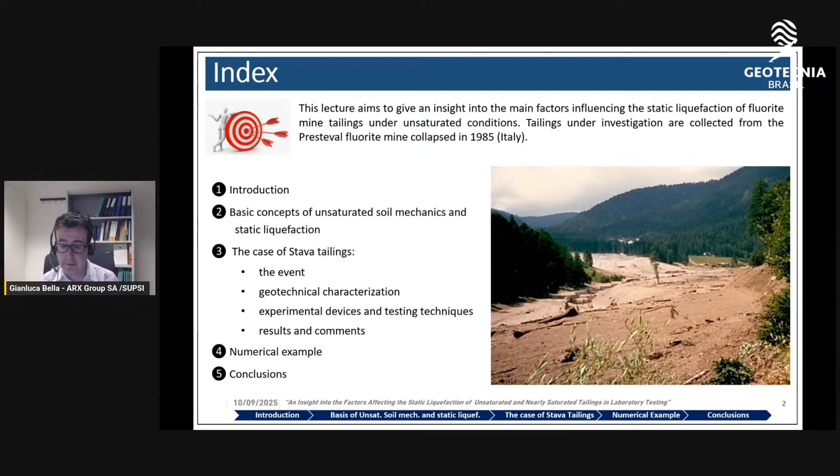Here is the structure of the current presentation. After the introduction, in the first part of the lecture, I will provide some basic concepts about unsaturated soil mechanics and static liquefaction. Then, in the second part, I will show you the main experimental results obtained by carrying out monotonic triaxial tests on the Stava tailings. Their susceptibility to static liquefaction was experimentally investigated by analyzing factors such as sample preparation technique, initial density, and degree of saturation. I will conclude my lecture with a numerical example where these concepts were used to perform a stability analysis of an ideal tailing dam. Finally, some conclusions and remarks will follow.

Okay, so let's start with the introduction. Tailings are the waste products resulting from the chemical and mechanical separation processes of mineral extraction, comprising mixtures of crushed rocks and processing fluids. Their particle size ranges from sand to clay silt sizes, and their production in recent years is constantly growing.

As you know, tailing dams represent some of the largest and most complex geotechnical structures in the world. These structures usually comprise a raised embankment constructed in stages over the life of the embankment, and a basin aimed to store billions of tons of tailings material. According to the classical hydraulic segregation profile, a higher permeability zone made up of coarse particles would exist near the embankment discharge point, with a lower permeability zone made up of fine particles farthest from this point, and between them, an intermediate permeability zone, the beach.

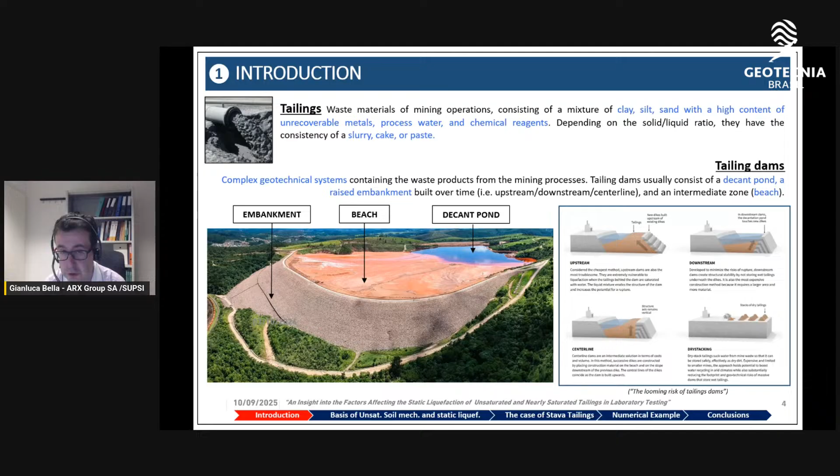Why is the stability of a tailing dam a relevant issue? I try to analyze some causes. Tailing dams are complex structures, and they are particularly prone to failure for the following reasons: they are made of heterogeneous filling material, and dams are raised step by step over a large period of time, many years.

Sometimes there are poor regulations or poor specific design criteria, even if in recent years regulations have made great advancement in many countries. And their large surface makes punctual criticality identification very difficult, requiring extensive and continuous monitoring, which is costly and time consuming.

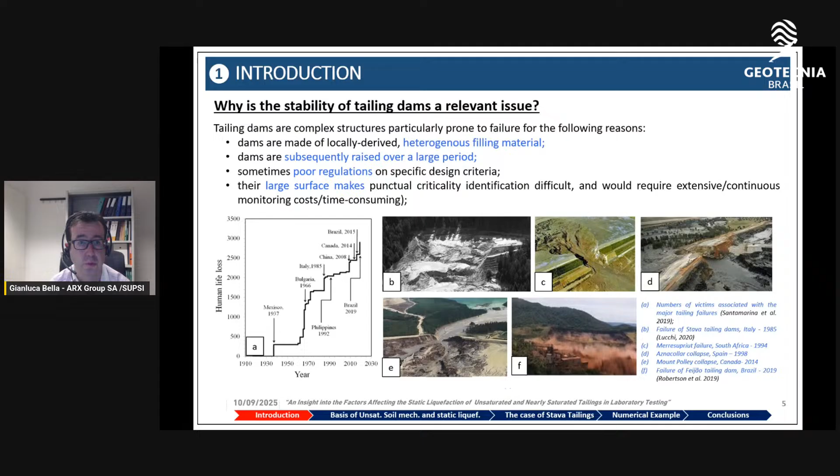So why is the stability of tailing dams a relevant issue? First of all, because the collapse of these structures may result in fatalities and significant economic and environmental impacts, as shown by recent failures in Brazil, South Africa, and elsewhere.

We can see that the annual tailing growth is estimated at about 12 cubic kilometers of tailings, and the total number of tailing dams - active, inactive, closed facilities - is very high: 8,500, with 217 cubic kilometers of disposed tailings. This quantity would be enough to fill a cube 6 kilometers high, so very large quantities.

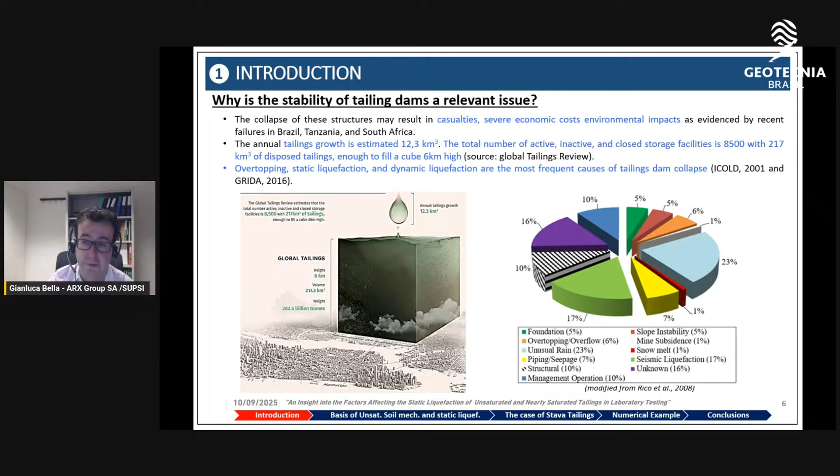Overtopping, static liquefaction, and dynamic liquefaction are the most frequent causes of tailing dam collapse, as we can see in the pictures on the left and on the right.

A list of the main causes of tailing dam failures. There are many factors that can contribute in combination to lead a tailing dam to fail.

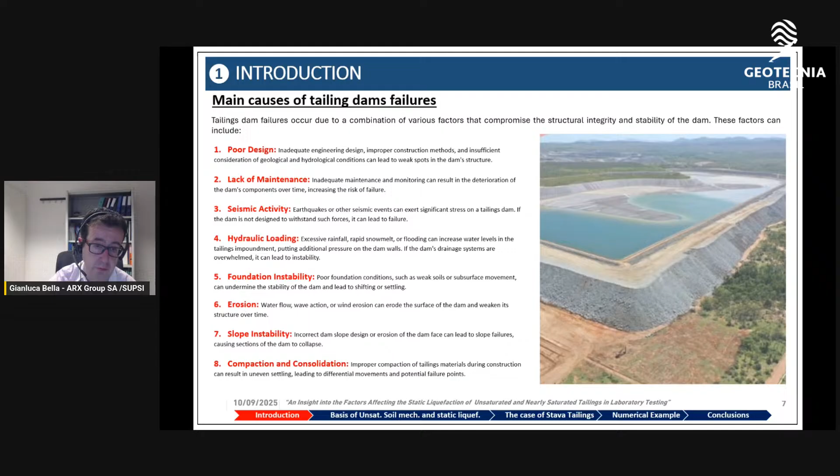First of all, poor design, then a lack of maintenance. Failure can be due to seismic activity or hydraulic loading, foundation instability, erosion phenomenon, slope instability, compaction and consolidation can be another cause of tailing dam failure, piping and seepage, structural failures, compartmentalization failures, or human error, and regulatory and oversight lapses.

But what I would like to focus on in today's lesson is the saturation of tailings. If tailing materials become overly saturated, they can lose shear strength and cohesion, making them prone to slumping and causing instability in the dam.

Finally, we have a change in water content as one of the main causes. Seasonal fluctuation in water content within tailings can impact embankment stability, particularly if the dam's drainage and water management are not working effectively.

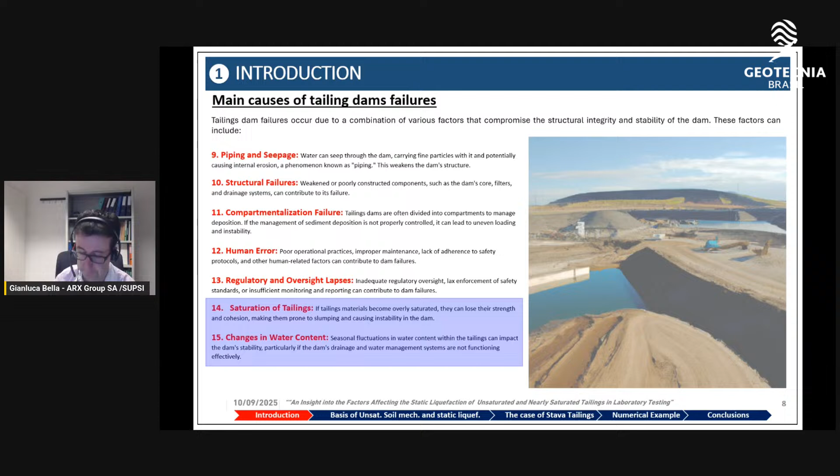Okay, so now we can move on to some basic concepts about unsaturated soil mechanics and static liquefaction.

As we can see in these pictures, tailing basins are heterogeneous and complex systems subjected to many external factors affecting their operation. For example, the amount of surface runoff, the infiltration rate, the consolidation process, or the capillary rise, as shown in these pictures. These factors, caused by interaction with the atmosphere, govern the position of the phreatic surface within the basin, leading to variation in the height of the unsaturated zone above the water table.

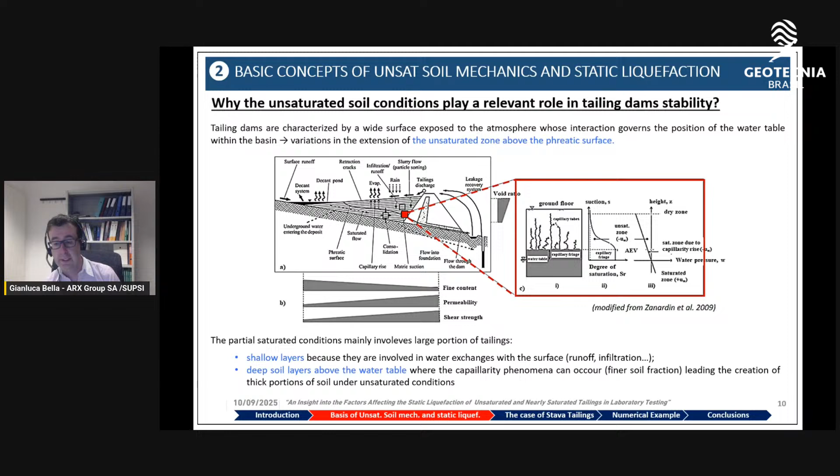The unsaturated condition mainly involves a large portion of tailing dams, in particular shallow layers, because they are involved in water exchange with the atmosphere, such as surface runoff, infiltration, and so on, and involves also deep soil layers above the water table, where capillary phenomena can occur, especially for the finer soil fraction, leading to the creation of a thick portion of soil under unsaturated conditions.

Above the water table, we have the so-called vadose zone, or capillary zone, in which capillary rise occurs because the soil pores act as capillary tubes.

Due to capillarity, we have an ascending flow of water within the capillary tubes, and this rise basically depends on the diameter of the capillary tubes and other factors that are constant when we deal with the same water system. The smaller the capillary tubes are, the higher the capillary rise is.

Therefore, imagine the soil as a group of capillary tubes having different sizes. At different heights above the water table, there are tubes that will gradually desaturate. So there is a zone immediately above the water table where the saturation is still total. Then there is a zone where the degree of saturation gradually decreases and becomes zero at a certain height distance from the water table, as we can see in the central pictures.

Contextually, we introduce the variable used to describe the pressure within unsaturated soil, which is the matric suction. It is the negative value of pore pressure. Above the water table, the pressures are negative, and thus we have a positive suction that increases with height.

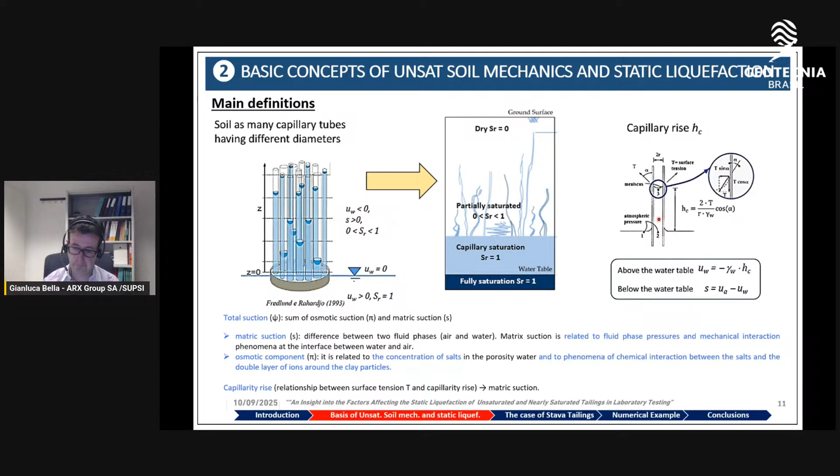Okay, so unsaturated soil can be assumed as a medium made of soil, water, and air. The effects of suction for unsaturated soils are the following.

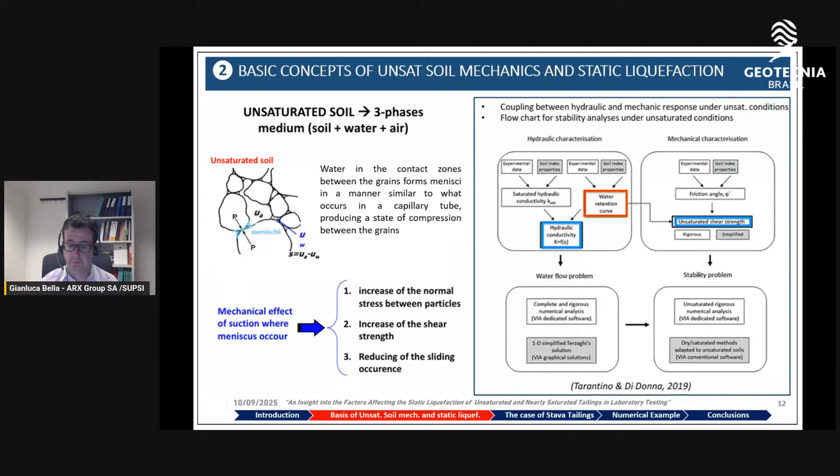According to Sladen, liquefaction is a phenomenon in which a soil mass temporarily loses a great part of its shear resistance when subjected to monotonic, cyclic, or impulsive loads, and it flows as a liquid. Recently, Olson defined static liquefaction as a complete loss of strength that occurs when the pore pressure of a saturated soil equals the mean total stress, bringing the effective stress to zero. As a consequence, when a soil liquefies, it behaves as a fluid since it has no temporary shear strength.

In the picture on top, we can see the definition of the state parameter, very useful to static liquefaction. This parameter was proposed by Been and Jefferies in 1985, and it is defined as the difference between the current void ratio and the void ratio at critical state. If this difference is positive, the sample is prone to liquefy, meaning we are dealing with a loose sample prone to show contractive behavior, and vice versa.

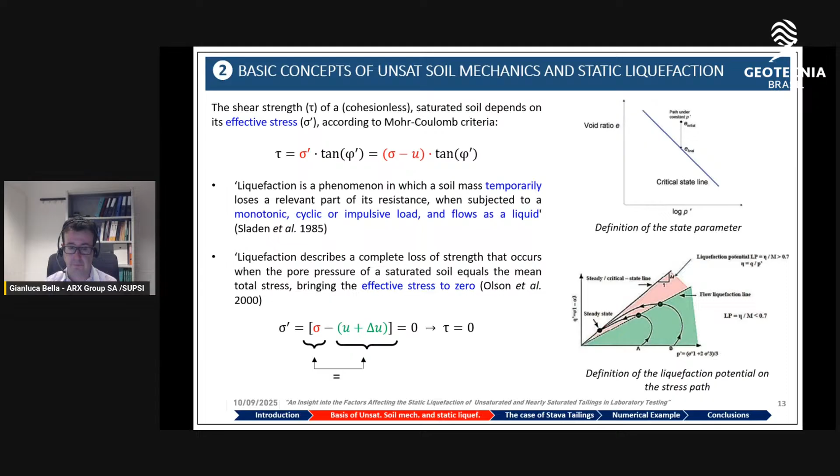Is static liquefaction correlated to tailing dams? Yes, the answer is of course yes. Static liquefaction, for instance due to heavy rainfall, is one of the major causes of collapse of tailing dams, leading to the higher numbers of tailing dam failures in the world.

It is worth remembering some considerations made by eminent researchers about it. Davies said that among the failures of tailing dams, static liquefaction is the most common, but also the least well understood phenomenon. And some years before, Fourie reported that in the past, many tailing dam failures have been wrongly attributed to other causes, and the role of static liquefaction has not been recognized as one of the leading collapse factors.

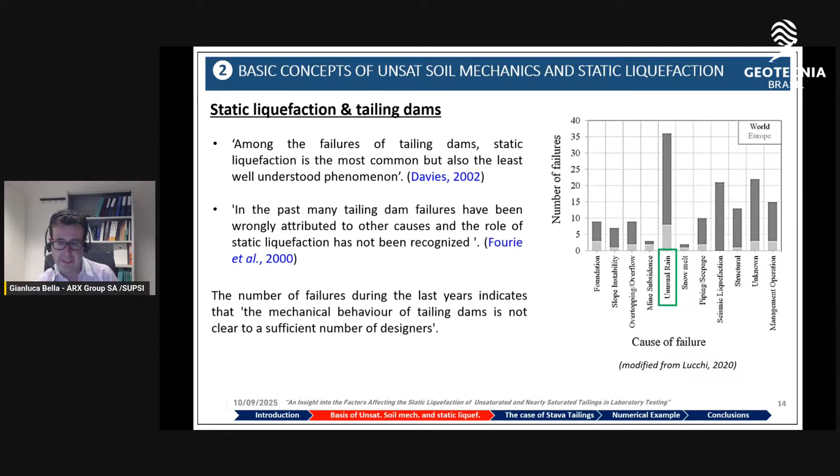So we can conclude that the number of collapses that occurred in the years indicates that the mechanical behavior of tailings at the moment is not clear to a sufficient number of designers.

So why are tailing facilities complex geotechnical systems particularly prone to failure? Guaranteeing the stability of such impoundments is, of course, one of the most challenging tasks in mine waste management. These storage basins are in fact prone to failure for static liquefaction for the following reasons.

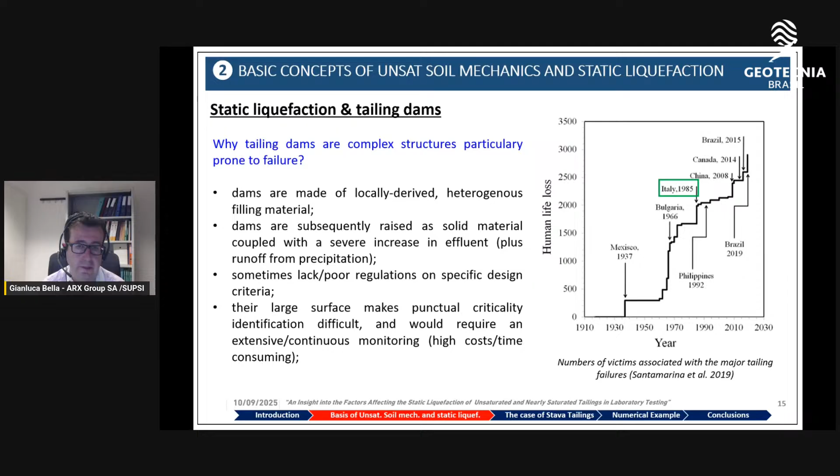First, they are made of locally derived filling material, soil, coarse waste, overburden material from mining operations. Second, dams are raised step by step, as I said before. Third, sometimes there is a lack of regulation, and of course there is some difficulty to identify punctual criticality.

With reference to the in situ scale, we can say that for a contractive soil, static liquefaction could be induced by fast variation in the total stress under undrained condition. For example, erosion of the dam toe, collapse of the foundation, excessive dam rising rate.

And more in general, the liquefaction can also be caused by change in the hydraulic conditions of the site. For example, increase of the phreatic water table caused by unusual rains, snowmelt, or failure/collapse of drainage systems.

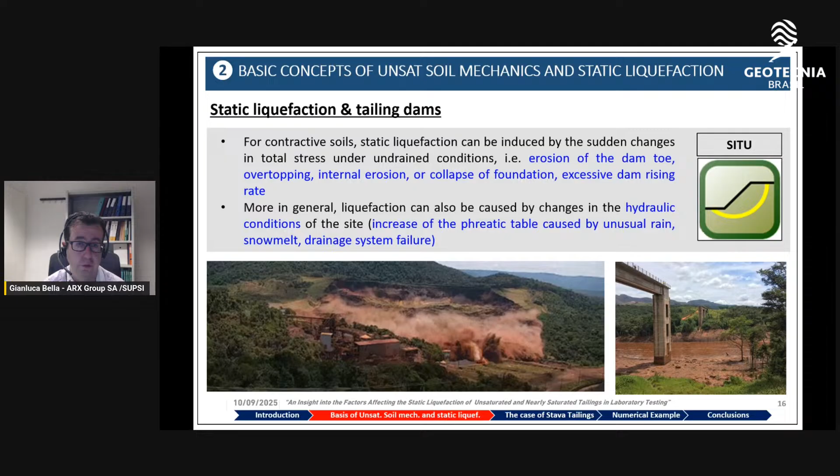And how can we study static liquefaction from the experimental point of view? In the previous slide, we saw static liquefaction from the in situ scale. Now we try to define static liquefaction from the laboratory point of view.

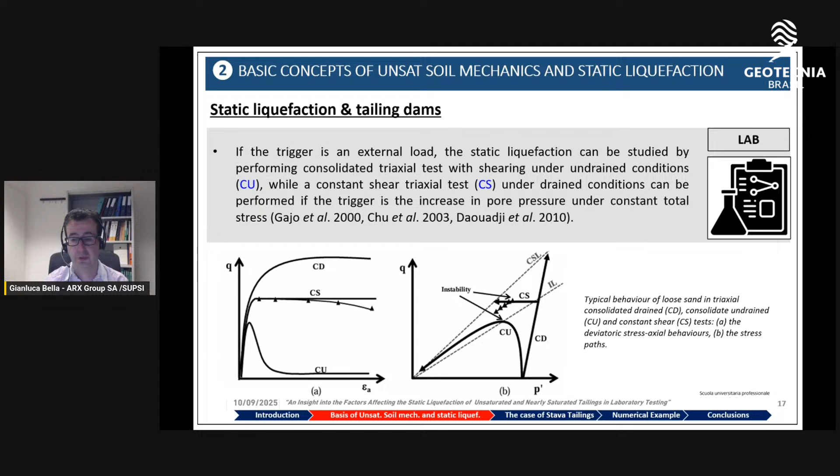If the trigger is an external load, static liquefaction can be studied by performing consolidated triaxial tests with shearing under undrained condition, while a constant shearing triaxial test, CS, under drained condition can be performed if the trigger is the increase in pore pressure under constant total stress. So there are different ways to study static liquefaction in the laboratory.

Finally, some case histories of failure due to static liquefaction. The Wachusett Dam at the beginning of the last century was the first example of a static liquefaction collapse, but it was not recognized at that time. Another famous example of failure due to static liquefaction is the Calaveras Dam in 1918 in the USA, and this is an example where static liquefaction was identified for the first time.

Then after that there were many other famous collapses. For example, the Merriespruit gold tailing dam in South Africa in 1994, or the Mount Polley dam in Canada in 2014.

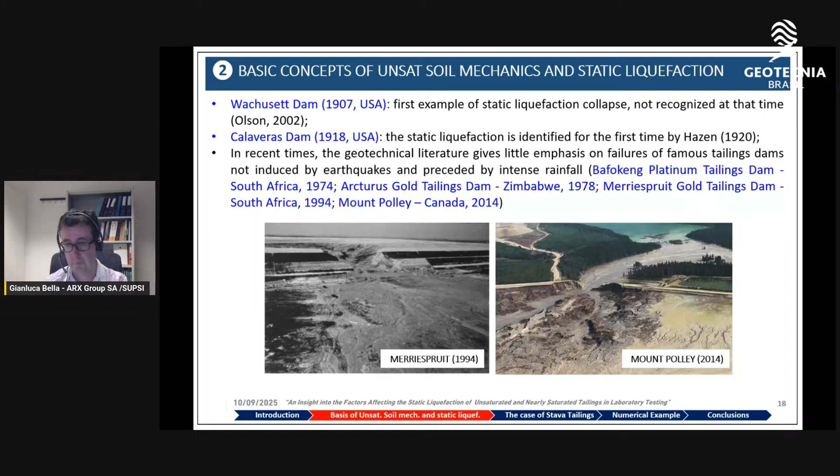So we can, from these slides, say that a deep knowledge of the hydromechanical response of tailings under unsaturated condition represents a fundamental aspect to perform reliable stability analysis of tailing dams.

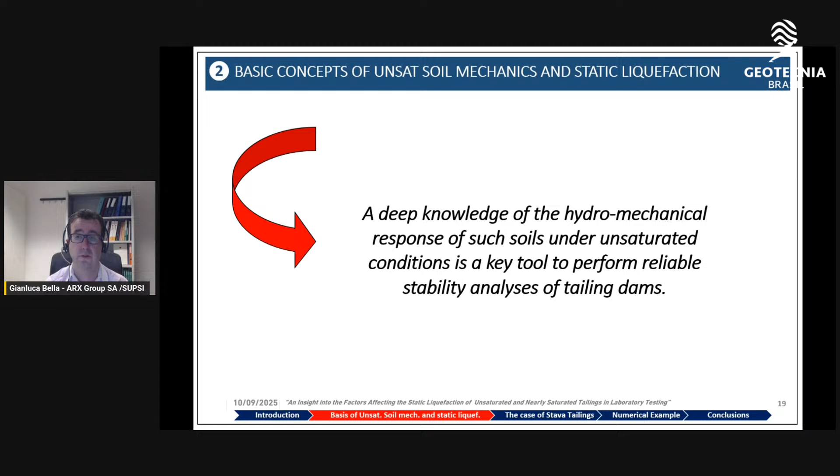After having introduced some concepts of unsaturated soil mechanics and static liquefaction, I can approach the core of these lectures, and this part deals with the experimental study of the static liquefaction susceptibility of a real case, the Stava tailings.

The soil under investigation is the silty fraction of tailings from the lower portion of the Stava upper dam, built one above the other on a natural slope near the municipality of Stava. We are in Italy. The two tailing dams were gradually raised to store the waste products coming from the separation process of the Prestavel fluorite mine.

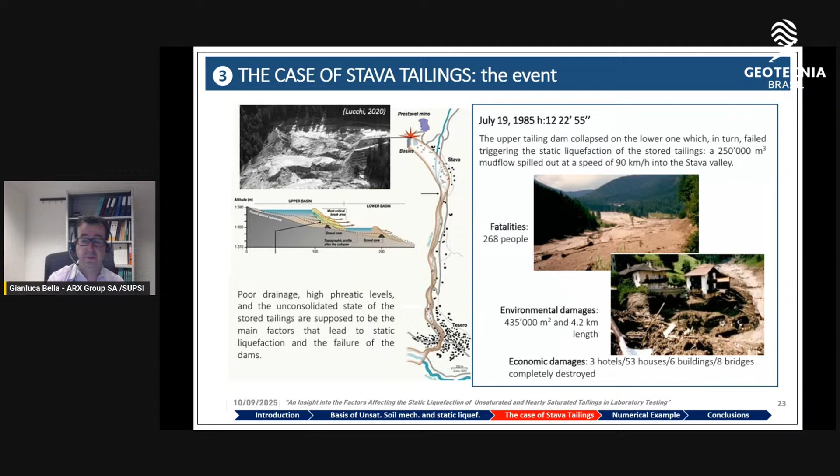Poor drainage, high phreatic levels, and the unconsolidated state of the stored tailings are supposed to be the main factors that led to static liquefaction and so to the failure of the dam.

Before showing you the experimentation to investigate the static liquefaction response of Stava tailings, it's worth noting that the same soil was previously characterized over the years by myself and by other researchers to investigate other aspects different from static liquefaction.

The first study was carried out by Carrera about 20 years ago. He performed basic oedometer tests and triaxial tests on Stava tailings under saturated conditions.

What she observed: the clean sand, as we can see in the picture on the top right, is subjected to liquefaction only for very high void ratio. The sand mixed with about 30% fines and 50% fines both reach liquefaction at a lower void ratio than the clean sand, and the 50-50 mixture liquefied at the lowest void ratio.

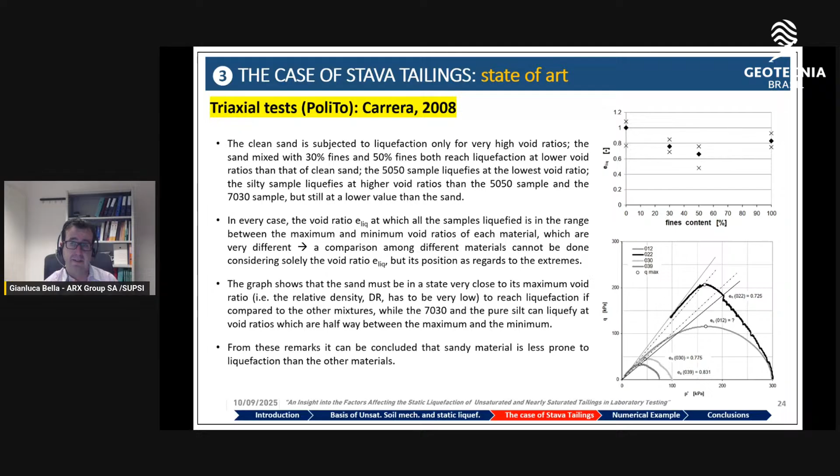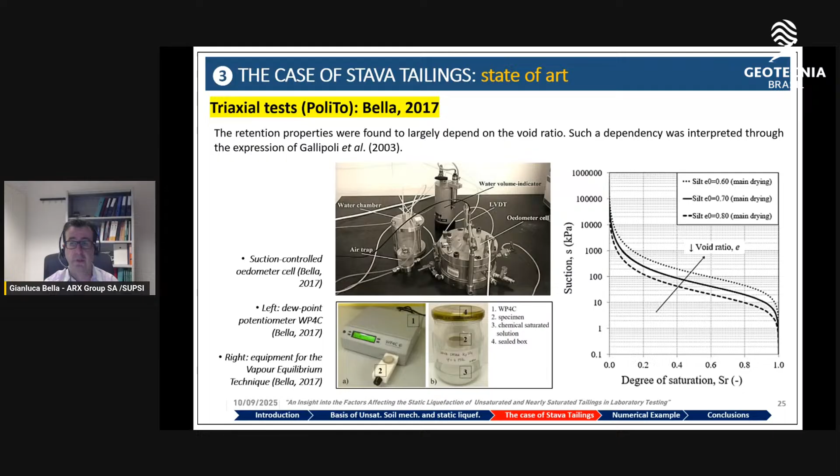After Carrera, there were some other research studies. In particular, I studied the research performed by myself in 2017 at Politecnico di Torino. I performed water retention tests using a suction-controlled oedometer to investigate the water retention response of the same soil. The retention properties of Stava tailings were found to largely depend on the void ratio, and such a dependency was interpreted through the expression of Gallipoli, obtaining the water retention curve given on the right.

Carrera in 2008 carried out an extensive experimental investigation to define the shear strength of the same soil under saturated condition. Some years later, I performed additional investigation using suction control triaxial tests to mechanically characterize the soil under unsaturated condition. On the right, we see the critical state line with experimental points: red for the saturated sample, black for the unsaturated sample. So we tried to characterize both unsaturated and saturated shear strength of the soil.

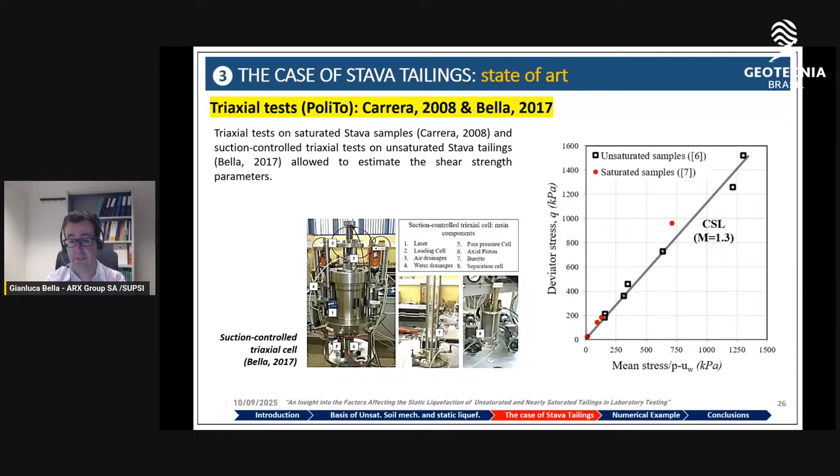Moreover, together with my colleague from the Applied University in Switzerland, we performed additional tests using a conventional oedometer to investigate the compressibility response of the Stava silty tailings in unsaturated and saturated condition, estimating the compressibility of the soil at different suction levels.

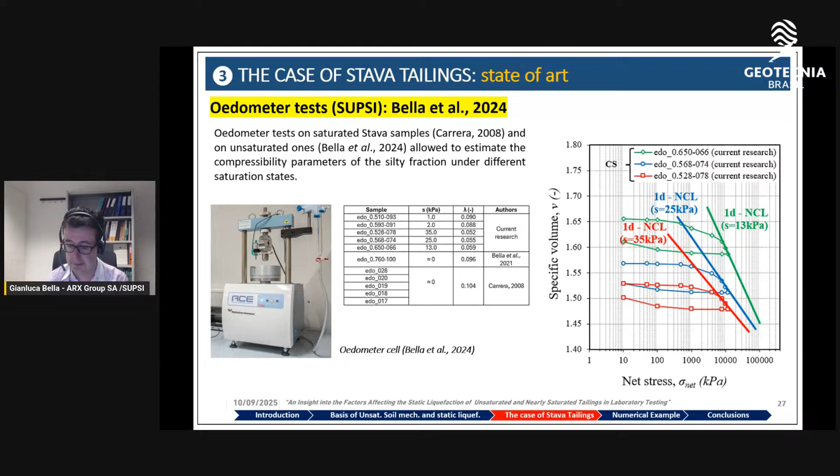Now let's come back to the current experimentation, the focus of these lectures, to investigate the static liquefaction of Stava tailing in unsaturated condition. Some monotonic triaxial tests were carried out on reconstituted samples, 38 mm initial diameter and 76 mm initial height. They were prepared at different initial void ratio and water content.

Two sample preparation methods were adopted. First, external compaction was used to prepare samples 1 and 2, and the moist tamping method was adopted for samples from test 3 to test 8. The moist tamping technique was chosen to reproduce one of the most common deposition procedures of tailings into the basin.

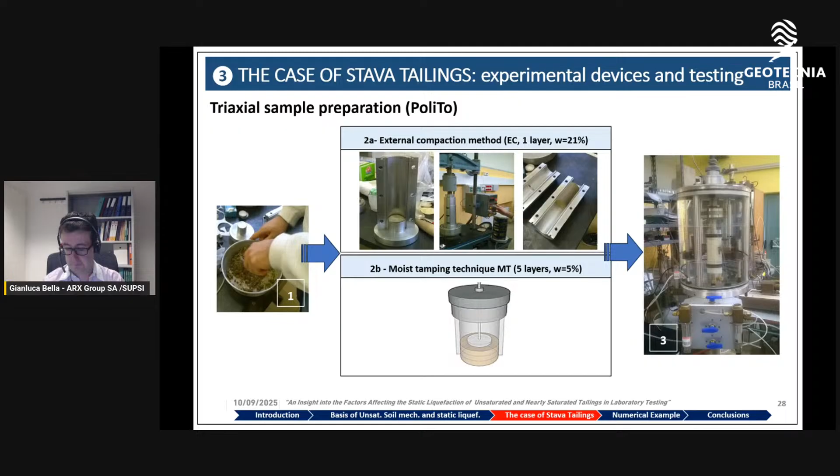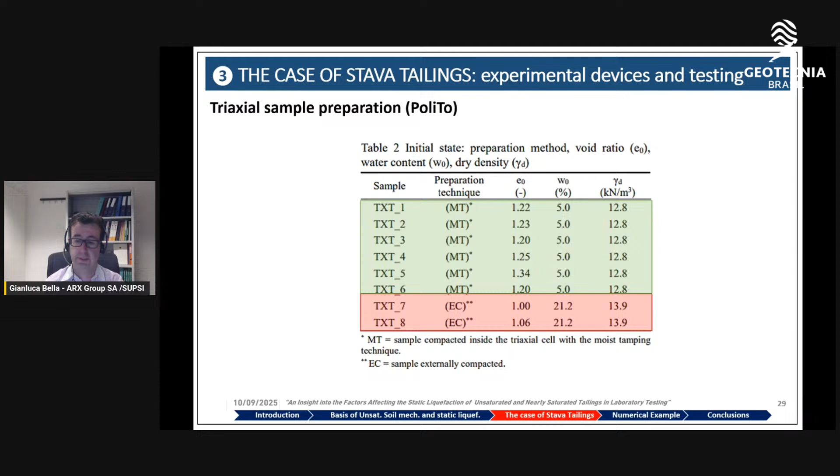The triaxial tests were carried out following these phases. First, partial saturation of the sample, involving the flushing phase and the back pressure phase, in order to get the Skempton coefficient parameter less than 1 - we obtained values from 0.89 to 0.99.

Then followed an isotropic consolidation of the sample, reaching a mean effective stress equal to 80 kilopascal, and finally a strain controlled shearing was applied under undrained condition at constant radial effective stress. Then back analysis was performed to analyze the real properties of the tested sample.

In these tables, we can see the void ratio at the final consolidation phase, the degree of saturation reached by each sample at the end of the consolidation phase, and the matric suction - the minimum and maximum values - estimated using the water retention curve shown some slides before. In the last column, we can see whether the sample liquefied or not.

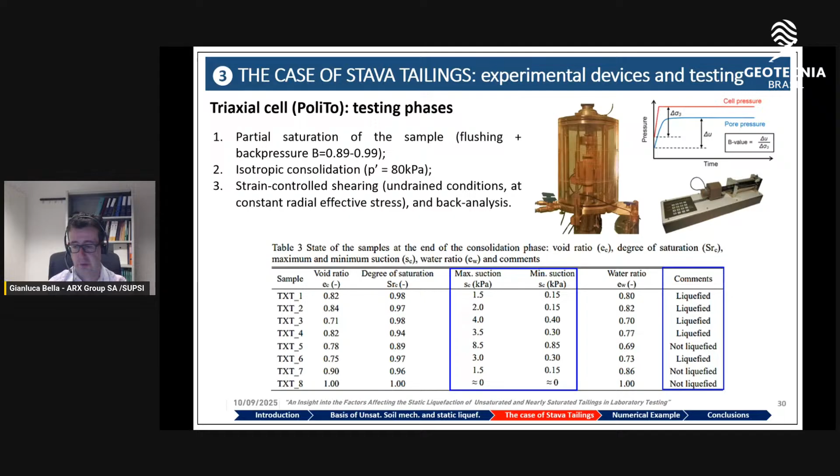During the B-check and during the consolidation, wetting was caused by the decrease in sample volume, not accompanied by an identical decrease in water volume. As the void ratio decreased during all these stages, the position of the main branches of the water retention curve evolved as well, with a general increase in the air entry value and the air occlusion value.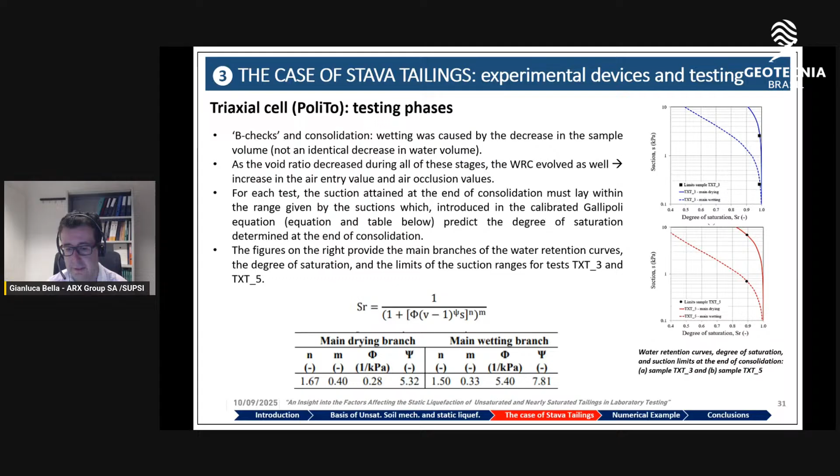Now we can go to the results of this experimentation and comment on them. The effect of the preparation technique on the hydromechanical behavior is investigated, since this aspect might represent a different deposition method of tailings inside the basin.

The stress paths of 3 samples are shown in the figure on the left. The samples were prepared by means of the moist tamping method, sample TXT4, and by the external compaction procedure, samples TXT7 and TXT8. Despite their degree of saturation being similar at the end of consolidation, they exhibited different stress-strain responses, as we can clearly see from the graph. Indeed, the looser specimens TXT7 and TXT8 show a hardening behavior, while test TXT4, even if denser, approaches the steady state by means of a softening response.

The stress path of sample TXT4 plotted in terms of mean effective stress and pore water pressure allows us to identify the instability line. This difference can be appreciated in terms of excess pore pressure developed during the undrained shearing phase.

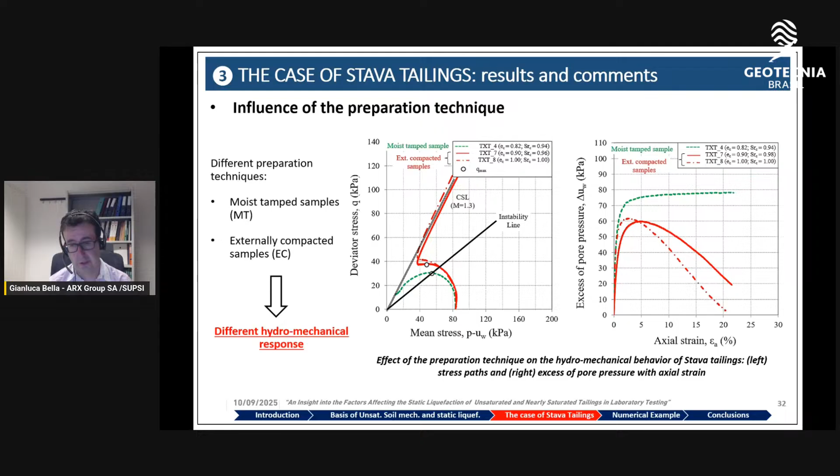So I repeat, the preparation method is very, very important to define and observe the behavior of the sample.

Now we can see some literature evidence of the influence of preparation technique on static liquefaction. The above results on the Stava tailings shown in the previous slide are in good agreement with the literature. On the left, we can see the effect of preparation technique on the mechanical behavior of some sandy tailings.

On the right, we can see the stress path followed by gold tailings having similar initial density but different preparation technique. In both cases, the moist tamped specimens were the most prone to liquefaction, showing a softening response followed by static liquefaction.

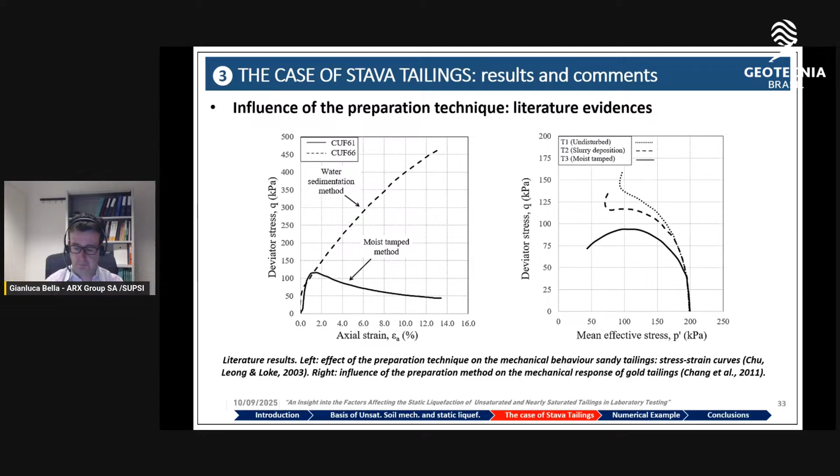Now we investigate another aspect, the influence of void ratio on static liquefaction. The effect of initial density on the stress strain response of Stava tailings was investigated.

As shown in the figure on the left, sample 1 and sample 3 were prepared by the same technique, moist tamping, and both had a degree of saturation of about 0.98. But their void ratio at the end of consolidation were different because of different volumetric strain that occurred during the flushing step. Despite this difference, the two samples show the same mechanical response, as we can see in the picture, deviatoric stress versus axial strain.

A very similar response was observed also for sample 2 and 6 in the picture on the right, which also had a different initial density but the same degree of saturation. It might therefore be concluded that, over the range of degree of saturation and void ratio explored, the value of void ratio has a negligible effect on the behavior. So we have similar hydromechanical behavior over a certain high void ratio.

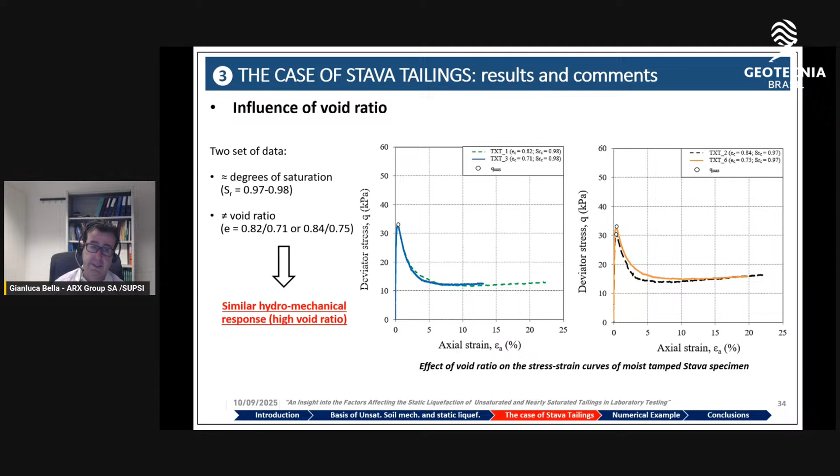The third aspect we investigate is the influence of degree of saturation. The effect of degree of saturation on the hydraulic and mechanical behavior of tailings was studied for moist tamped samples. The void ratio at the end of consolidation for tests 1, 4, and 5 was very similar.

But their degree of saturation was different, as shown in the figure on the left: 0.98 for test 1, 0.94 for test 4, and 0.89 for test number 5, the red line.

Sample 5 shows a maximum deviatoric stress higher than those experienced by sample 4 or 1. The residual value of the deviatoric stress of sample 5 was about 30 kilopascal, twice that of test 4 and test number 1. These results seem to suggest that, in the context of Stava tailings, a degree of saturation below about 90% is sufficient to significantly reduce the softening.

These results are in good agreement with the experimental outcomes obtained from soils sheared by carrying out monotonic and cyclic tests from other authors.

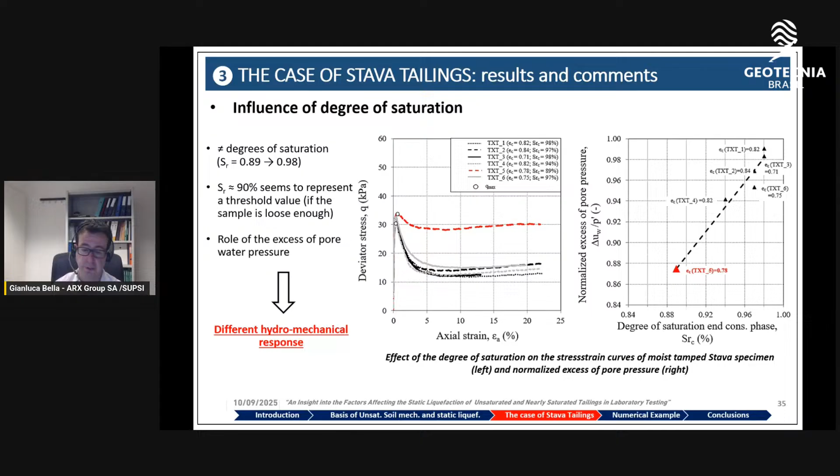On the contrary, when the degree of saturation of the unsaturated sample is below 90%, as is the case of sample number 5, the developed excess pore pressure is much less than that of the saturated sample, leading to higher strength even for a loose sample that could be prone to liquefy because of its initial density.

A preliminary interpretation of these experimental results provided in the previous section could be given by considering the relationship between the big Skempton coefficient and the degree of saturation, defining the Skempton coefficient as the ratio between the excess pore pressure and the cell pressure.

Under the hypothesis of an elastic and isotropic behavior of all the components, the experimental BSR points were fitted by the Reuss equation, properly modified to consider a soil skeleton made of interconnected pores filled with two fluids, water and air. The elastic response was assumed to be due to a homogenized fluid, whose bulk modulus Kf was evaluated by considering the modulus of the two phases depending on their volume fraction. Under such a hypothesis, the Bishop equation was modified and a good agreement between the experimental points and the theoretical BSR curves was observed also for Stava tailings, as shown in the picture on the left.

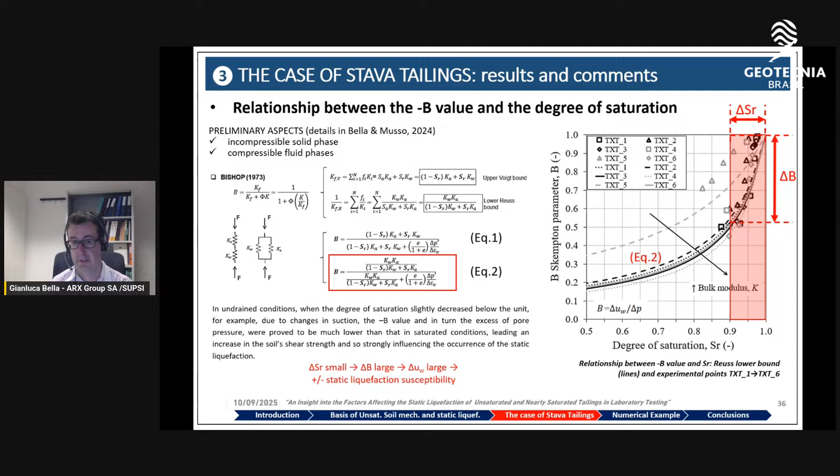In undrained condition, when the degree of saturation slightly decreases below unity, for example due to change in suction, the B value and in turn the excess pore pressure were proved to be much lower than in saturated condition, leading to an increase in the soil shear strength, which strongly influences the occurrence of static liquefaction, as shown in the pictures.

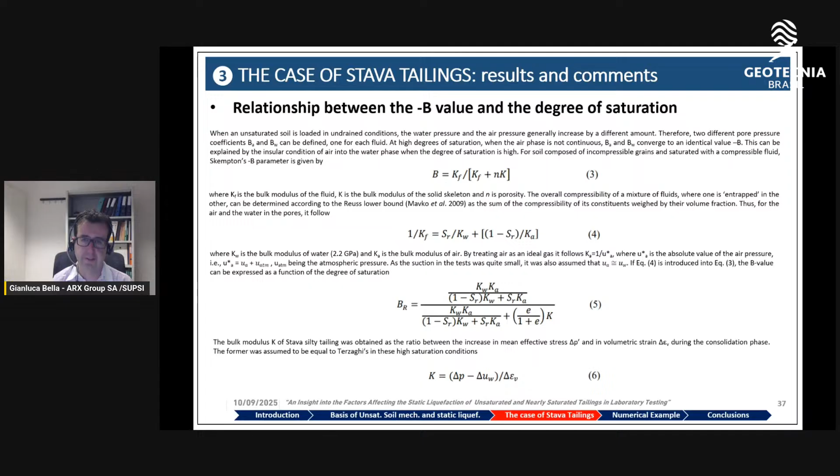Here we can see an analytical mathematical passage to derive the above BSR relationship, but for a matter of time I would skip this part. Of course, I'm available for any detailed clarification for those interested. Just send me an email and we can go into detail of these formulations.

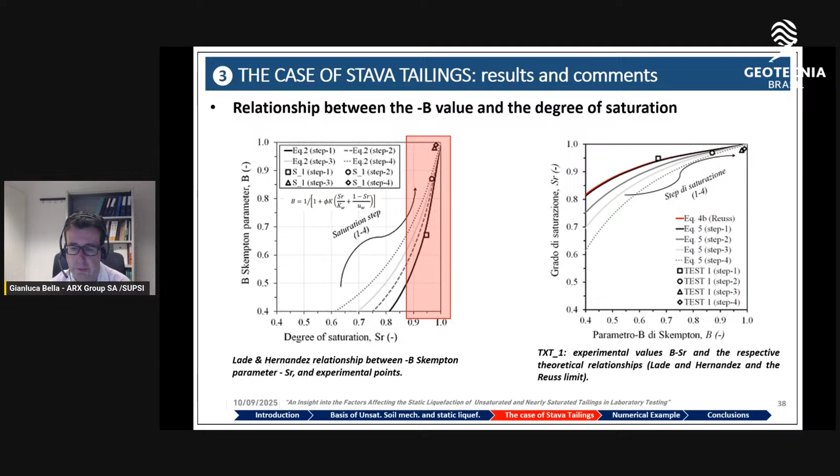Finally, a comparison between the values obtained by applying the Reuss limit relationship and the Lade-Hernandez relationship, together with the experimental BSR, is given in the picture on the right for test number 1, showing again a good agreement with all these relationships.

I'd like to conclude with a preliminary interpretation of the exposed behavior of Stava tailings within the frame of the critical state theory. It's worth remembering that the critical state is a condition in which, as deformation proceeds with shearing, volumes of soil tend toward an ultimate state in which shearing strain can continue without further variation of volumetric strain, deviatoric strain, or mean effective stress.

In unsaturated condition, no variation of water ratio is also expected within shearing strain. Within the framework of critical state, the susceptibility of a soil to liquefy is related to the state parameter, as I mentioned before, proposed by Been and Jefferies as the difference between the void ratio E and the void ratio at critical state, E_cs, under the same mean stress.

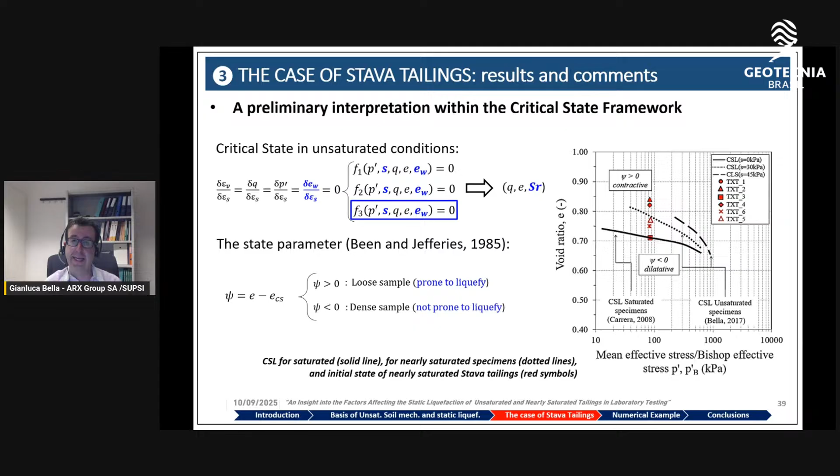This can be explained considering that as the degree of saturation decreases, the induced overpressure decreases as well, as previously detected from the B parameter-SR relationship. On the other hand, the pore pressure increase developed during tests 1, 2, 3, 4, and 6 was large enough to bring this sample to liquefaction, as confirmed by the experimental results previously exposed. Finally, this larger pore pressure increase can also be explained in terms of reduced compressibility of the pore fluid mixture and by the evolution of the B parameter with the degree of saturation.

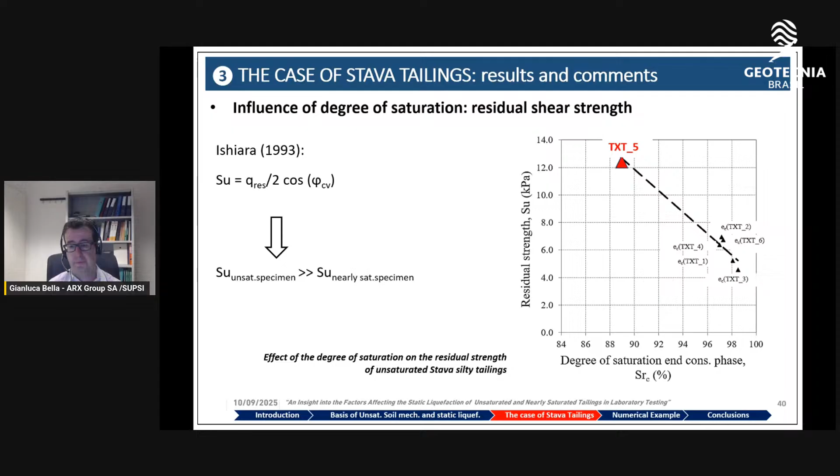So what are the implications of the above results? For instance, we can preliminarily estimate the shear strength of the soil to be used in stability analysis. The static liquefaction of Stava moist tamped samples was evaluated by means of the Ishihara equation. The residual strength of the unsaturated sample number 5, shown in red in these pictures, results about 2 times greater than that of the nearly saturated samples 1, 2, 3, 4, and 6, as shown in these pictures.

After having introduced some concepts of soil mechanics, and some major results obtained from experimentation in unsaturated conditions, I would like to show you in a very short time a numerical example.

This application is taken from my recent paper published for the National Conference of Geotechnical Engineering Researchers. We studied, from the numerical point of view, the influence of the degree of saturation by using the material point method, in particular the Anura 3D code, which uses a large strain continuum approach.

The liquefaction occurrence was studied by considering a simplified approach in terms of undrained shear strength that is related to the saturation degree of tailings.

The geometry of the tailings storage reproduces the section of an upstream configuration with a slope 2 on 3 on the external side, while the subsequent upstream dikes built on top of progressively deposited tailings have an average slope of about 1 on 3. For the secondary dikes, the starter dams and the foundation soil drained strength parameters are considered, and the Mohr-Coulomb failure criteria is used in this simulation.

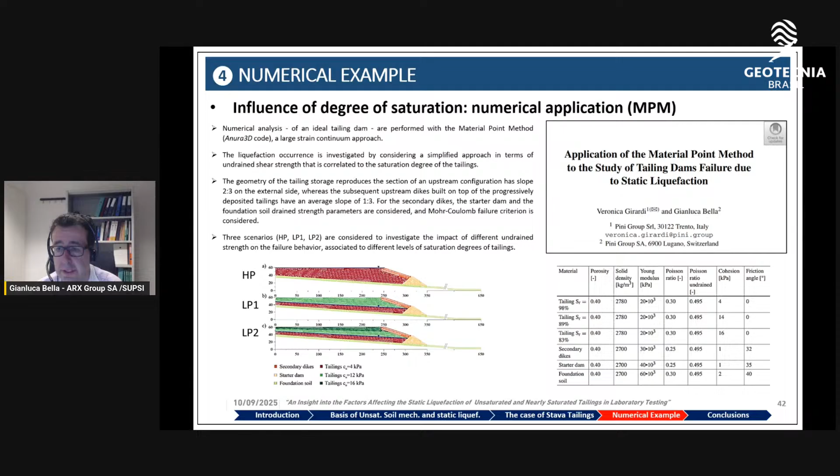We perform simulations by simulating the three positions corresponding to the three scenarios of the phreatic surface, imposing, of course, the properties corresponding to these different degrees of saturation.

First of all, the three scenarios, HP, LP1, and LP2, show a similar failure mechanism at the beginning of the simulation, at time 10 seconds, with a similar shape and slightly lower plastic strain for LP compared to the HP scenarios. If we consider the evolution of the failures, the figure on the bottom, it's possible to appreciate a great difference in runout distance for the three scenarios.

The contours of the final displacement for HP, LP1, and LP2 show the effect of the progressive lowering of the initial water table. With increasing value of undrained strength, the propagation of tailings downstream tends to reduce, with the maximum final displacement equal to about 300 meters for the high phreatic level scenario, reducing to 215 and 191 meters for the scenarios with lower phreatic surface.

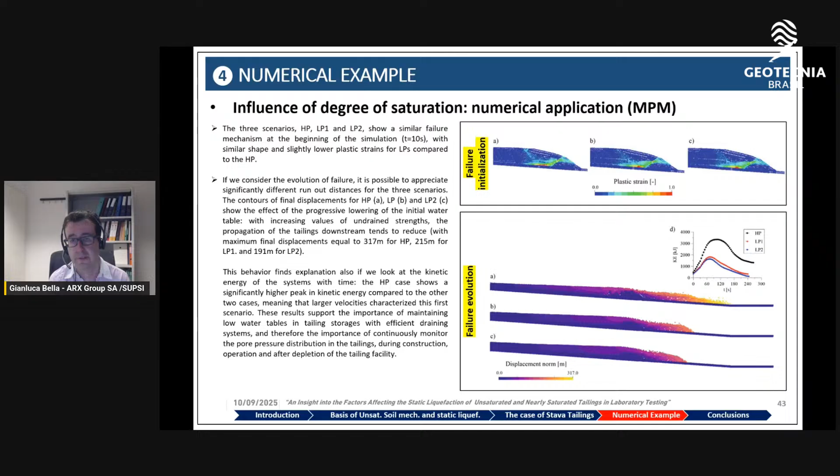This result supports the importance of maintaining low water tables in tailings basins with efficient drainage systems, and therefore highlights the importance of continuous monitoring of the pore pressure distribution within the basin during construction, during operation, and after the closure of the tailing dams.

So I would like to conclude as follows: static liquefaction has been recognized as one of the major causes of tailing dam collapse.

Tailing dams interact with the atmosphere, and to account for the possibility of static liquefaction, also in unsaturated condition, analysis should be able to reproduce the pore water pressure and the degree of saturation in the vadose zone.

This research presents an insight into the hydromechanical behavior of the Stava tailings in nearly saturated condition, with a special focus on the static liquefaction response. We investigated some factors affecting static liquefaction, in particular the preparation technique, the soil density, and the degree of saturation.

The influence of the preparation method was investigated, while externally compacted samples did not show tendency to liquefy. The moist tamping samples were more prone to liquefaction, even though they started from void ratio and water ratio lower than the externally compacted samples. So the preparation technique strongly influences the mechanical response because it leads to different soil fabrics of the sample.

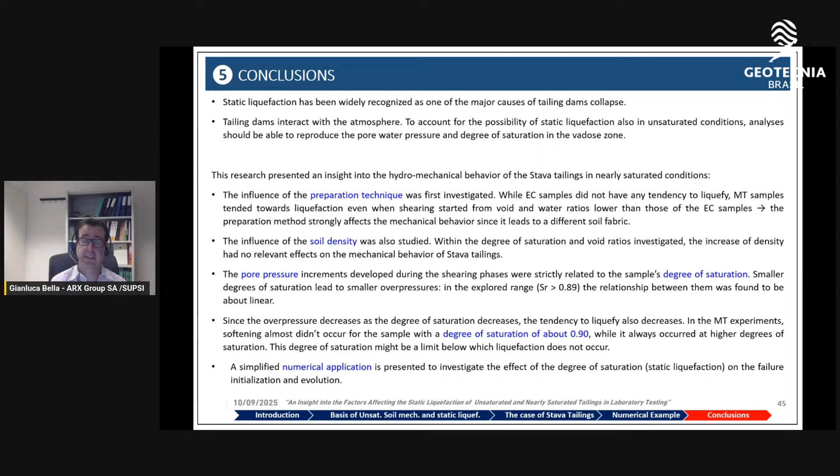Finally, a simplified numerical application is presented to investigate the effect of the degree of saturation on the failure initialization and failure propagation.

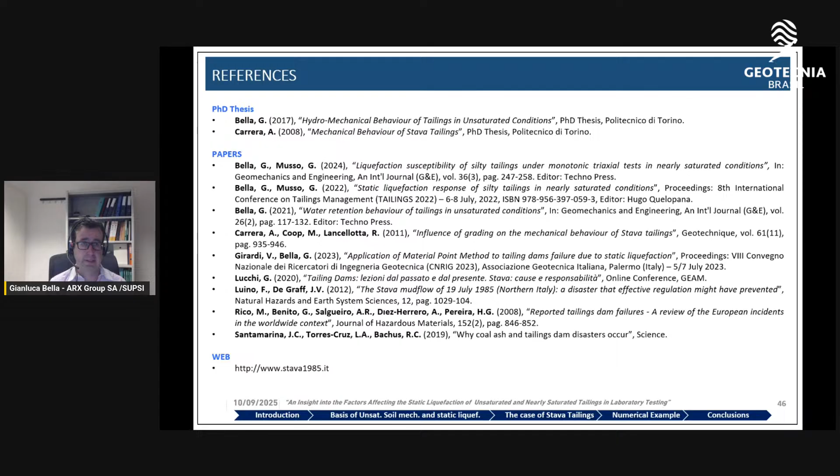Here you can see the list of references used for these lectures, some PhD theses, mine and Carrera's thesis, some papers, and some websites.